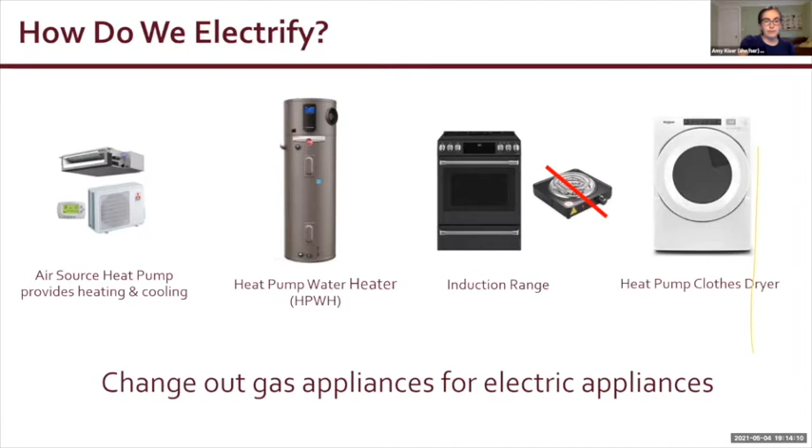So why do we want to electrify buildings? Because there are many benefits to electrification, including benefits to climate change and reducing greenhouse gas emissions, improved health and comfort, equity benefits, long-term cost savings, greater resilience and safety, and good quality high road green jobs. So in the next few slides, I'm going to go into each of these benefits a little bit more.

So buildings are the biggest polluters after cars and transportation. As electricity from the grid gets cleaner, moving to 100% carbon-free by 2045, emissions from all electric buildings will eventually disappear. All electric buildings that have rooftop solar or purchase 100% renewable electricity, like I did, are already zero emission.

The production, transport, and distribution of natural gas emits methane, a powerful greenhouse gas that's 86 times stronger than carbon dioxide, and this gas infrastructure is leaking all over. We know that climate change affects communities of color first and worst, and that tackling climate change is especially important.

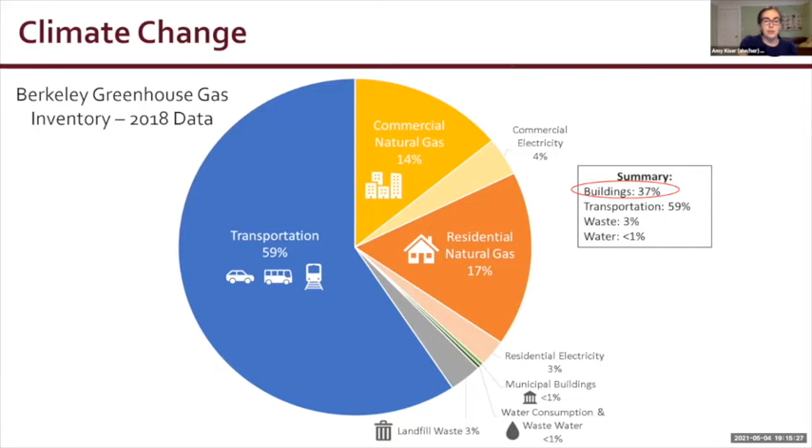Burning gas in household appliances produces harmful indoor air pollution that can increase the risk of and exacerbate asthma and other respiratory problems. Without proper ventilation, emissions from gas appliances such as carbon monoxide can even be deadly.

Studies show that air quality in a home with gas appliances, like your gas stove, can be much worse than outside, exceeding even the toxin levels allowed by the EPA outdoors. Studies have shown that children in homes with gas stoves have a 42% higher chance of developing asthma symptoms.

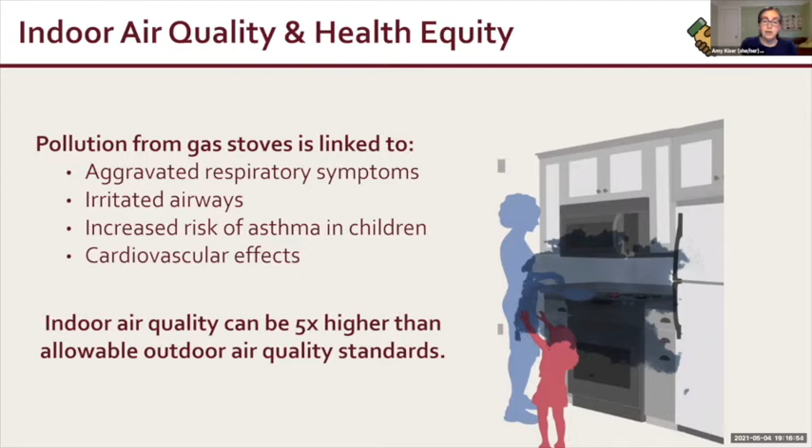And we know that the health impacts of climate change affect Black and Brown communities the most. It's those same communities that are most affected by asthma hospitalizations in Berkeley, especially children of color. By finding a way to equitably remove natural gas from our homes, electrification can make a difference in these health outcomes.

With climate change, we'll experience more extreme heat, and lower income residents are more likely to live in substandard housing that is poorly insulated. Many Berkeley homes and buildings don't have air conditioning, but when natural gas heaters are replaced with heat pumps, a heat pump gives you both heating and cooling, providing comfort on hot days.

Plus, these systems can provide clean ventilation during smoke events. So if it's hot and smoky, with a heat pump, you are incredibly comfortable inside.

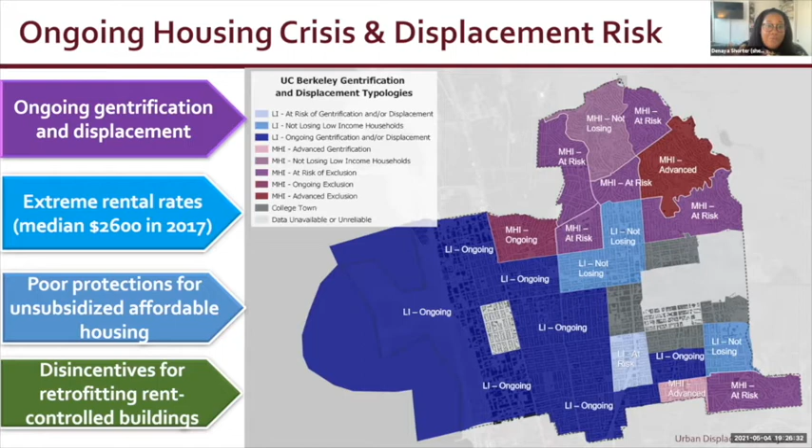This was something that was greatly considered in developing this strategy. Going back to the full strategy, reading that community engagement piece, the Ecology Center led a lot of that engagement. We were intentional, we did it early, and will continue to promote and encourage the city of Berkeley to continue this outreach and engagement, especially focused and intentionally in marginalized communities.

We heard a ton of great feedback that was already incorporated into the strategy. It's been rewritten and drafted multiple times because we wanted to ensure that feedback was being utilized and valued. Some of the feedback we've heard, of course: upfront and long-term costs are a big concern. It doesn't matter how big the costs are, concerns hit different communities differently. So that was definitely heard, understood, and incorporated into the drafting of these policies.

Health, safety, comfort, and resilience benefits of electrification should be accessible. So we're talking about accessibility for all communities and what that looks like, feels like, and how that is implemented with this strategy. More education is needed, meeting people where they are. We understand there's a bit of a spectrum in understanding what electrification is and how it impacts people. So we're making sure that in engaging our community, the education is accessible, culturally relevant to different communities, and continuous so folks can continue to be involved.

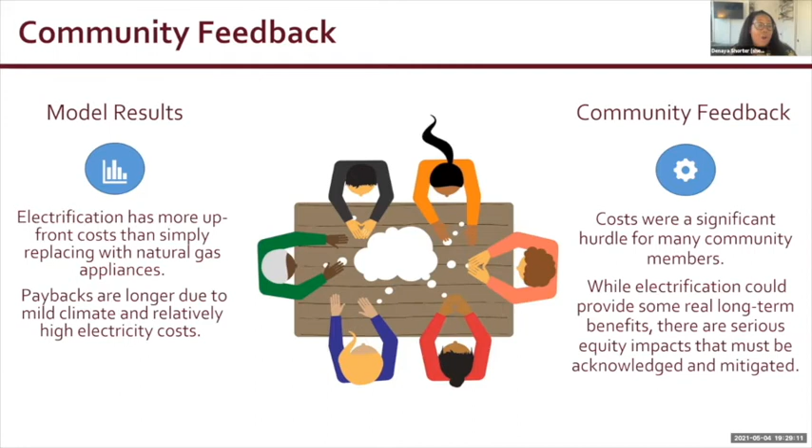From the community feedback, the team developed what we have called equity guardrails, as a way to ensure that the policies would only move forward and be required — of course not mandated — once they could be done so equitably. This next slide gets into what those equity guardrails are.

From the beginning, the city of Berkeley wanted to make sure that we're leading this effort with equity in mind, and through that equity lens in every single thing incorporated into the strategy. So these equity guardrails really serve as that foundation of the strategy, as a set of very minimal requirements, at the very least, that the recommended proposals must meet in order to advance this work.

You can see here the four equity guardrails that we have included in the strategy: access to health and safety benefits, ensuring equitable access to marginalized communities and others most impacted by climate change, making sure that those benefits are shared and especially prioritized for the communities hit first and worst by the adverse impacts of climate change.

Access to economic benefits, ensuring all community members, especially those marginalized communities most heavily impacted, have equitable access to the funding and financing mechanisms, high road jobs, opportunities, and are receiving the economic benefits of a project of this magnitude. Maximizing ease of installation gets back to accessibility in our community.

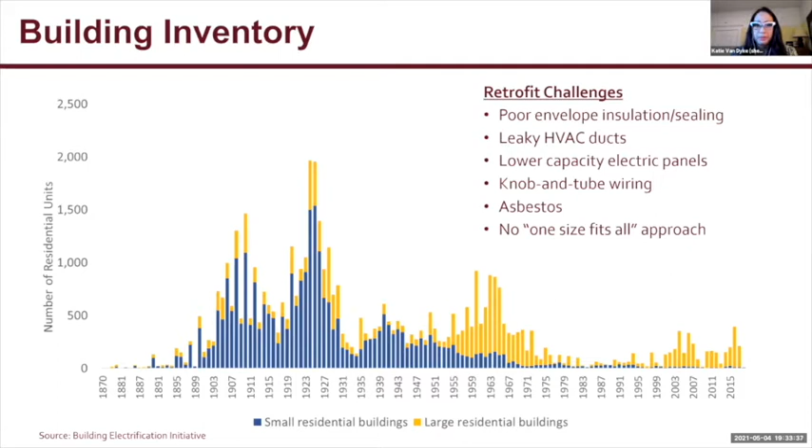The team also conducted a cost analysis. RMI led this work using a mapping model that showed the costs of energy for approximately 36,000 low-rise residential homes. We then analyzed how much it would cost to electrify those homes using different modeling scenarios.

Some of the key takeaways from this work were that rooftop solar can improve the financial payback under current conditions for some, but there are equity considerations that need to be addressed. Envelope improvements like insulation and air sealing are really important and provide comfort and resilience benefits, but they did not always pencil out financially. We found longer paybacks for electrification in multifamily buildings, and also saw equity implications in the costing—for example, longer paybacks in some of our historically disadvantaged areas of the city.

And please note that these do include labor, but they don't include any extra costs that may be incurred, like a new panel, electrical rewiring, or utility infrastructure upgrades.

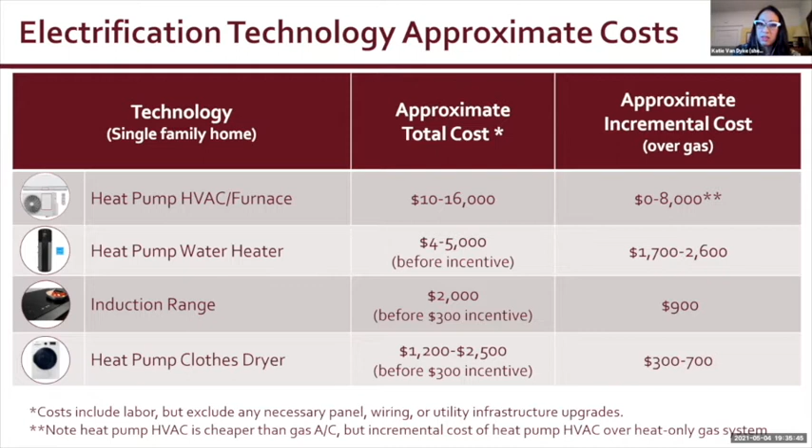Although air conditioning may seem not very necessary in Berkeley today, we know the climate is warming, and market modeling suggests that 30 to 45% of homes will have air conditioning by 2050. Finally, even with supportive incentives, we need more financing programs in order to scale.

This next slide shows the modeled bill impacts of installing electrical equipment. We know the transition can't scale unless there are bankable savings. Based on current technology prices and utility rates in Berkeley, returns are currently a mixed bag. Some appliances, such as heat pumps, can provide bill savings, but others may increase utility bills.

Further, because electricity is now going towards time-of-use rates, where using electricity between 4 to 9 p.m. will be peak or more expensive, these rates will have a big impact on people's bills, and there may be uncertainty on returns depending on when people are using these appliances moving forward.

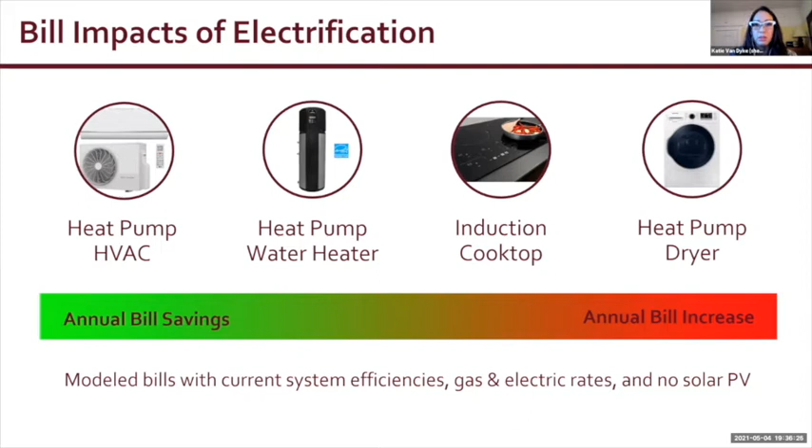So the cost modeling done by our team showed that electrification in Berkeley under current market conditions with our mild climate can be expensive. We're going to need to work collectively to find ways to both reduce these costs and develop more affordable and accessible financing and funding options as soon as possible so that we can bring electrification to scale.

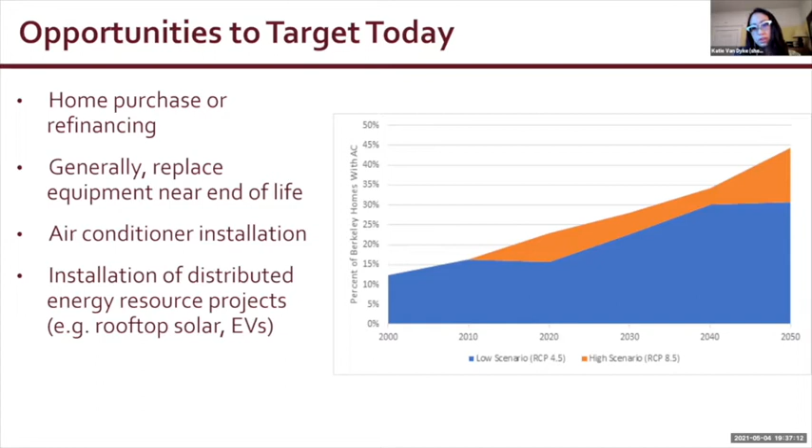However, the modeling did show that there are currently some opportunities that can pencil out financially today. These include when someone's purchasing or refinancing a home, generally when replacing equipment near its end of life, when someone's already planning to install air conditioning, and when someone is investing in distributed energy resource projects like rooftop solar, storage batteries, or electric vehicles, although there are some equity considerations here too.

So when looking at these costs, it's important to remember some things. First, there are several non-monetary benefits that are not included in these numbers, such as health, comfort, safety, resilience, and avoided climate impacts. Also, this market is evolving very fast, and there may be opportunities to reduce these costs and adjust the timeline with the shifting of external programs, technology, financing programs, and high-quality jobs.

And now I'm going to walk you through the draft strategy, which was developed as a result of all of this work that we did together.

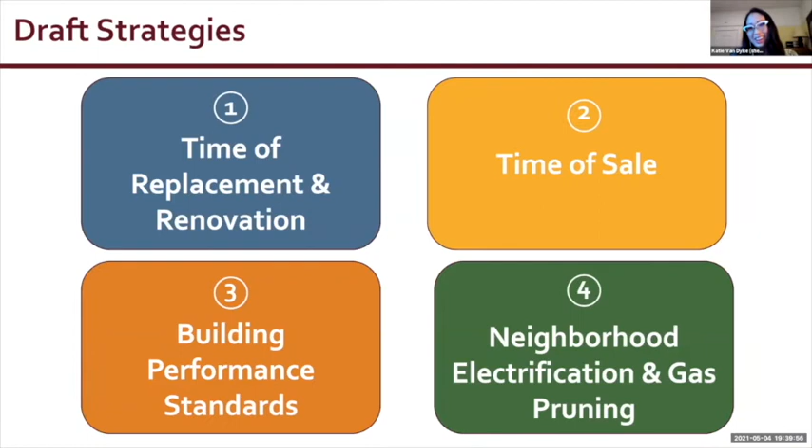So next, we're going to dive into the 4 primary strategies in more detail. Under current regulatory and technological conditions, no single pathway will be enough to achieve the city's carbon neutral goals, and each of these pathways should be pursued. I'm going to provide some more information on each of these next, and in the report, we provided even more detail, including specific program and policy actions for each strategy.

So the first strategy addresses electrifying when equipment is being replaced at its end of life and at point of major renovation. While renovation can be a good opportunity to electrify for cost and convenience purposes, it introduces some challenges by being piecemeal and doesn't allow for full system redesign efficiencies. Point of replacement also introduces challenges with timing. For example, if your water heater goes out, you're going to want to replace it right away versus waiting the time it may take to install the wiring needed for an electric heat pump water heater and any other potential upgrades, such as a panel upgrade.

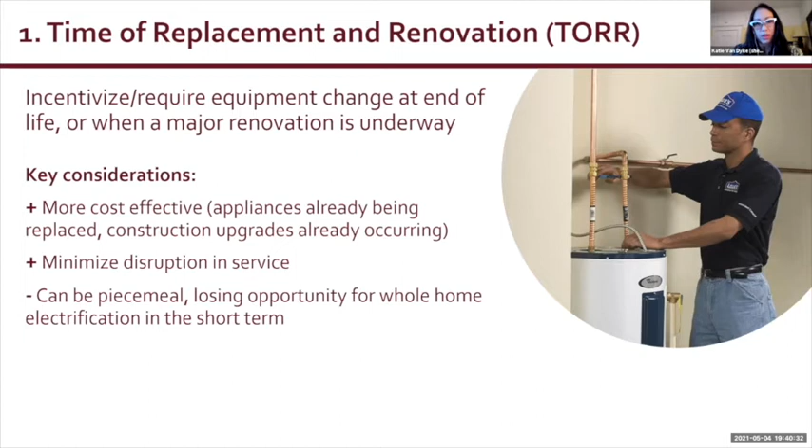The time of sale strategy touches all buildings that are bought and sold and would require either the seller or potentially new buyer to make upgrades to the home. It builds on Berkeley's Building Emissions Savings Ordinance, or BESO, which already requires buildings that are sold to disclose an energy score and list out potential electrification upgrades. BESO was recently amended to include mandatory upgrades at time of sale, and the city will be working to define when and what those requirements will be.

The building performance standard strategy would require buildings to meet minimum standards. An example of a building standard might be requiring buildings over a certain square footage to reduce greenhouse gas emissions to a certain level by a certain date. This strategy also builds on BESO's requirement for larger buildings.

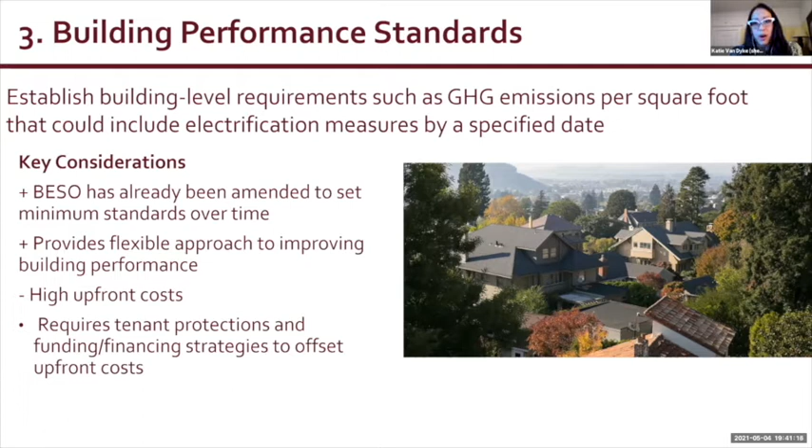Finally, the fourth strategy looks at simultaneously removing natural gas infrastructure to a given neighborhood or set of buildings and electrifying those buildings. We know that gas infrastructure poses a threat to our health and safety, and if we just electrify homes here and there, the utility still needs to continue serving that entire neighborhood. If, however, we can find a way to strategically decommission the gas infrastructure on the neighborhood scale, this could provide efficiencies of scale, as well as a clear and strategic approach, sending a market signal, and it can also avoid stranded assets. This is a solution that's also of interest to labor groups to advance high quality jobs.

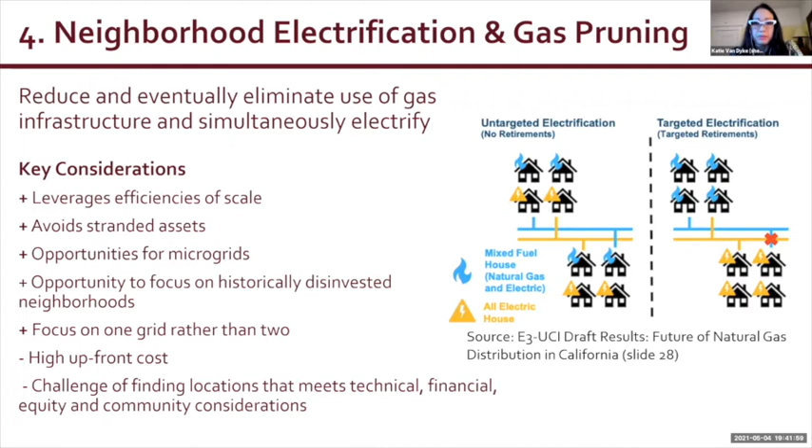And finally, let's take a look at the time frame to electrify all of Berkeley's buildings. Given the potential cost implications of electrification that we found in the cost modeling, and as a direct result of the feedback we heard from the community who had a lot of concerns around the cost, the team developed a phased approach to this strategy. This approach attempts to balance the urgency of the climate crisis by moving as quickly as we can on some things that can pass the equity guardrails in the short term, while taking some time to do additional work to ensure that any electrification policies and programs in the longer term can pass the equity guardrails, so that this enormous task of electrifying all of our buildings can be done so equitably at scale.